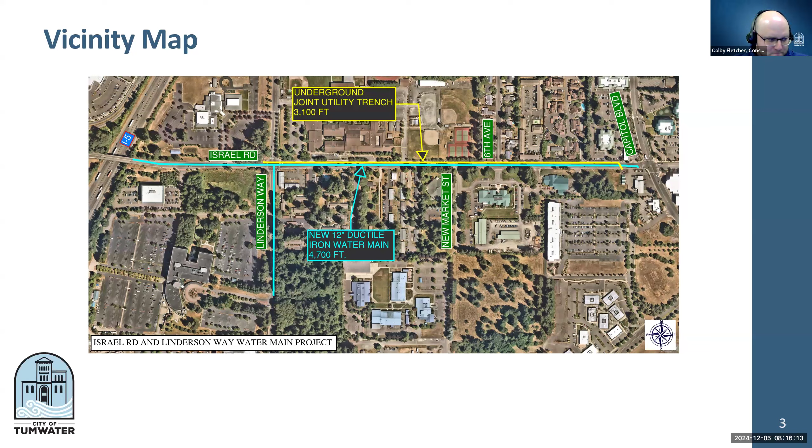For this project, overall there was almost 5,100 feet of brand new ductile iron water main for water transmission, including 22 connections to existing water lines and services, laterals for private services. There were also 57 new gate valves, 6 new hydrant assemblies, and 14 water service connections. The joint utility trenching also occurred, totaling about 3,150 feet, including PSE Electric, Lumen, Comcast, and Astound. So all those utilities are now underground.

And it also included 330 square yards of new sidewalk, driveway, and curb ramps that we had to demo out in order to get some of these new water services and stuff in.

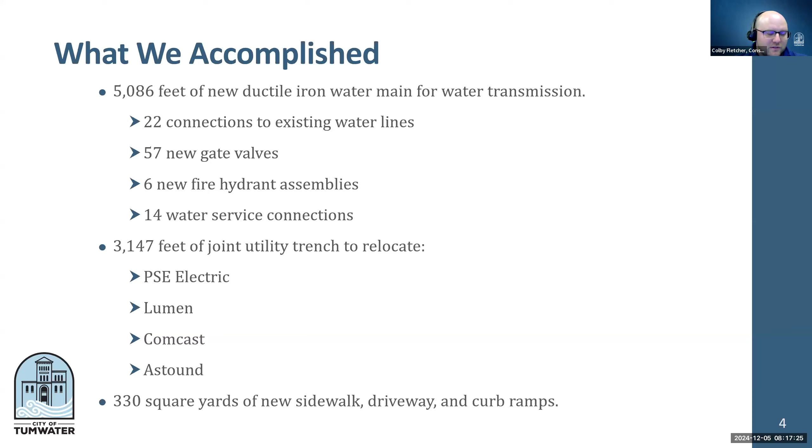As far as the joint utility trenching is concerned, it's been a lengthy process trying to get PSE and all the private utilities undergrounded. They are all complete now, and we're just waiting for PSE to come out and remove the poles.

I'd like to showcase a couple photos highlighting some of the challenges we had. This is the trench excavation and water main installation, here's the brand new water main. As you can see in the photo on the left, we often had to navigate existing utilities, including some that were never located or that we didn't have records of, so there were a lot of challenges navigating that. The photo on the right is a typical valve assembly.

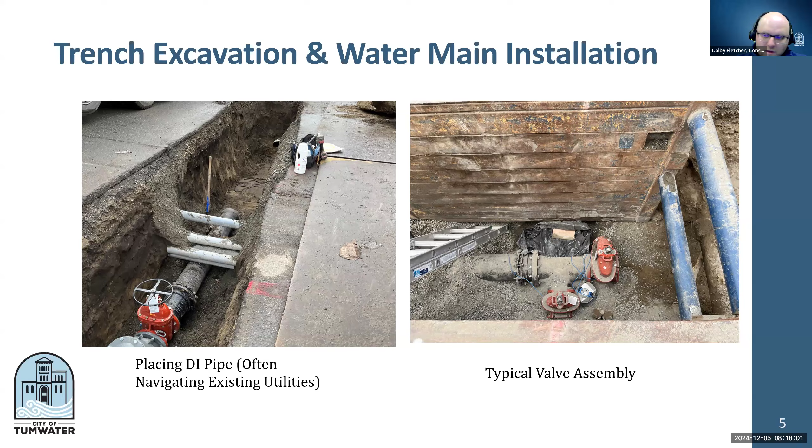Here's some trench restoration photos. You've got the shoring in there for the workers to install the ductile main in the trench, backfilling it on the left, and then going through with the HOPAC and using density testing from MTC, one of our on-call consultants, to confirm that our trench was compacted correctly and accurately.

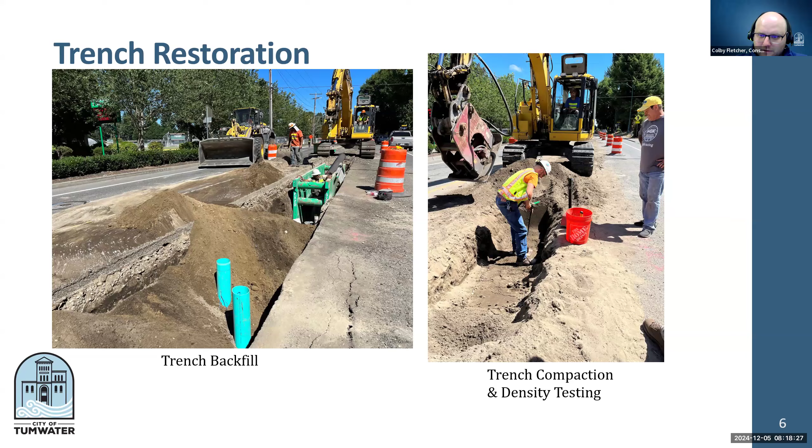This is the last slide showcasing the joint utility trenching that occurred. On the left you can see the larger conduits and the separation between them - that's all the PSE transmission conduit, with some pretty large ones for their electrical mains. On the right side is all the private utility conduit, which included a spare for the city in case we ever wanted to do something in the future. In the right photo, we have our PSE pull vaults and a transformer vault installed right in front of the high school.

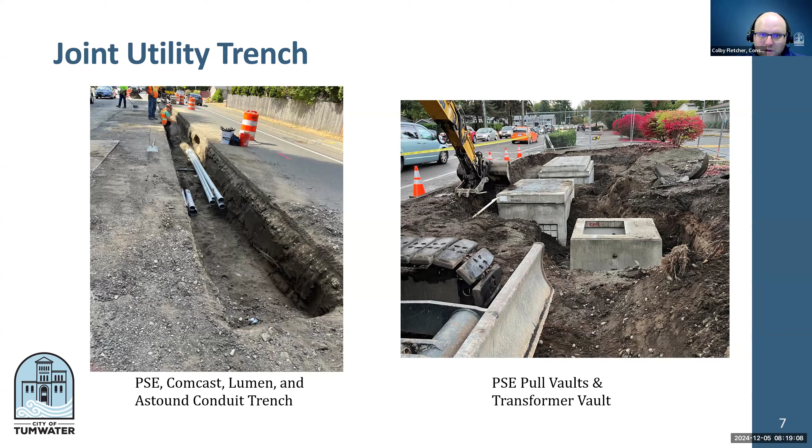So the financial summary and project timeline: we broke ground on this project on July 31st of 2023. Substantial completion occurred on April 12th, 2024, and physical completion occurred May 9th, 2024. Overall funding was the Water Fund CFP, and the lowest bid was Reed Trucking and Excavating at $3,365,536.16, with a final contract amount of $3,866,098.95. We do realize this was over the original bid amount by approximately 15%.

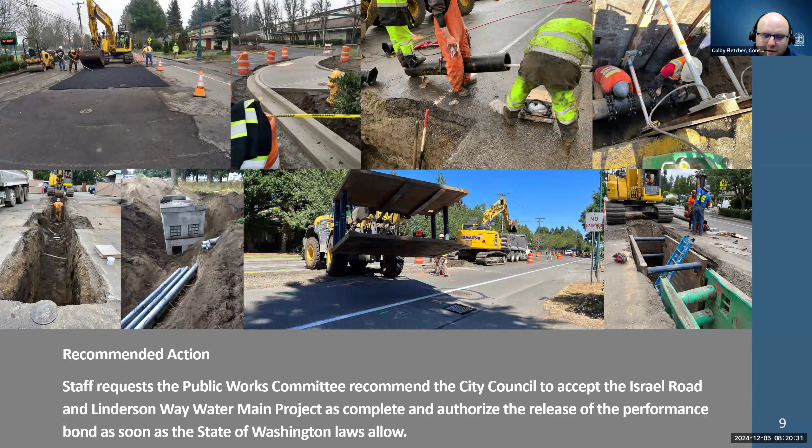So that concludes the presentation I have. The recommended action is there, and I'll be available to answer any questions.

All right, okay, Councilmember Jefferson, do you have any questions?

Colby, I appreciate the photos and I love the photos because it shows our humble - and I call you humble - employees hard at work, just the quiet professionals behind the scenes, working hard. So thank you, keep those photos coming. Will do.

Yeah, echo that. People just take it for granted when you turn your water on, so I appreciate your work making sure we have access to safe water.

All right, with that, if you don't have any other questions, I'll go ahead and read the recommended action. Staff requests the Public Works Committee recommend the City Council accept the Israel Road and Linderson Way water main project as complete and authorize the release of the performance bond as soon as the laws of the state of Washington allow. So moved.

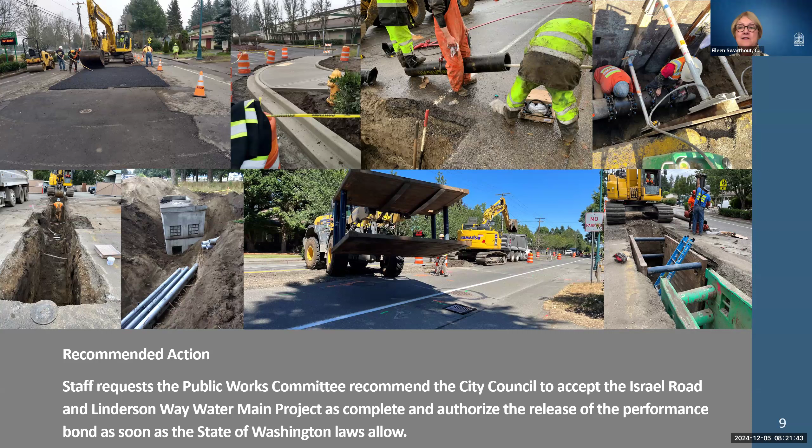All right, all those in favor say aye. Aye. All right, another one down.

Thank you, Colby. I keep waiting - we're gonna have a grand opening someday. I keep thinking it's probably gonna be in the rain though, to celebrate the opening of that road officially.

All right, so it looks like we're moving on to the next item, the acceptance of work with Specialized Pavement Marking LLC for the 2024 citywide striping project. Colby, you're back up again.

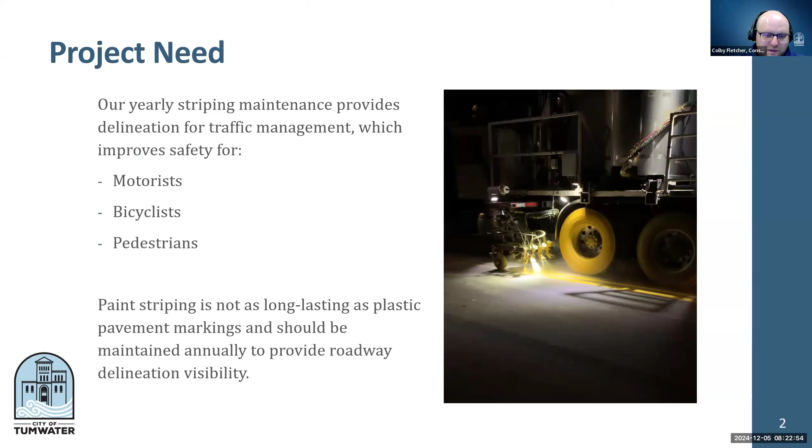2024 citywide striping acceptance of work presentation. This project is our yearly striping maintenance project, providing delineation for traffic management and improved safety for motorists, bicyclists, and pedestrians. We typically use paint to update our longitudinal lines. It's cheaper and more cost effective. It doesn't last as long as plastic pavement markings, but that's why we do this annually, just to increase visibility of our roadways.

Project overview, with a vicinity map showing the magnitude and scope of this project. The scope was to repaint existing pavement markings, restripe Deschutes Parkway's parking stalls, and change the center skip stripe to a solid double center stripe.

The operations of this work were primarily done on weekends, coordinated outside the busier traffic hours. This was a mobile operation with signs and chaser vehicles following behind the striping company, ensuring drivers didn't change lanes onto the wet paint.

You can definitely see the extent of that over there, as far as all the roadway networks that got restriped.

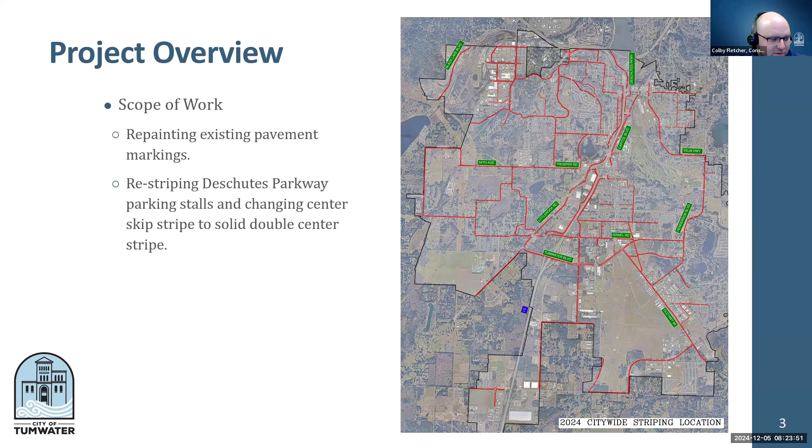What we accomplished: we restriped all the longitudinal pavement markings, with just one application over existing markings. We touched up the centerline stripes, fog line stripes, bicycle lane stripes, and the parking stalls at Deschutes Parkway. Overall, we had 515,000 linear feet of 4-inch paint line, just over 97.5 miles, and 169,000 linear feet of 8-inch paint line, just over 32 miles.

Since this project was just painting, plastic pavement markings and raised pavement markers are planned to be tackled in the 2025 pavement maintenance project. We're actively designing that project in-house currently and will get it going next year.

Financial summary: the estimated construction cost range was approximately $130,000 to $150,000. Our low bid with SPM, Specialized Pavement Markings, was $136,933.50, and our final project cost was $129,436.76, a little under budget. That was due to a couple of roads originally scheduled that didn't end up getting done.

This project was funded by the City of Tumwater Streets operating budget. With that, the recommended action is similar to the last one. I'm able to field any questions if there are any.

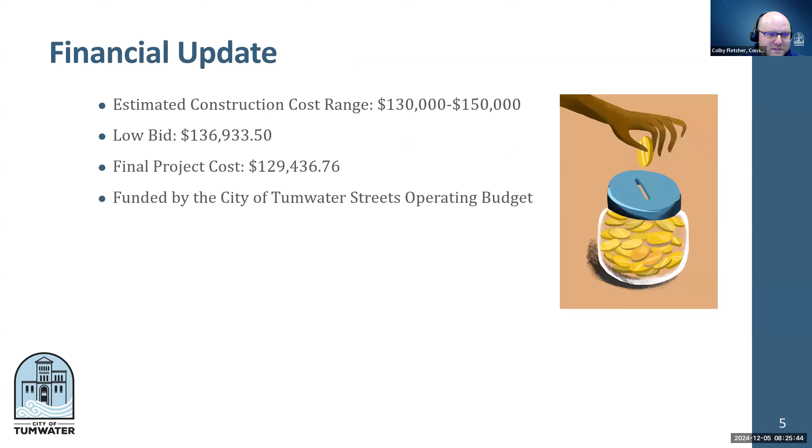That'll be coming up next. Appreciate that. I live on R.W. Johnson, and we were striping that one. I didn't realize we were striping, and I hear this weird noise, and it's like, oh, we got stripes. Thank you, you're very stealth-like out there.

So the recommended action before us: staff requests that the Public Works Committee recommend the City Council accept the 2024 citywide striping project as complete and authorize the release of the performance bond as soon as the laws of the state of Washington allow.

I second that motion. All those in favor say aye. Aye. Aye. All right, thank you, Colby, for another year of great work. Thank you, enjoy the rest of your day.

All right, so now we're going to move on to our last topic, and it has to do with the Transportation Benefit District. We'll be hearing from Brandon.

Actually, I'm going to jump in front of Clint real quick. Clint Ritter is going to be doing the presentation today, and I just wanted to introduce him. He's our new Assistant Director for the Transportation and Engineering Department, since Mary Heather moved on to the city of Pasco. Welcome. He's got a boatload of experience working for Pierce County, WSDOT, and the Transportation Improvement Board.

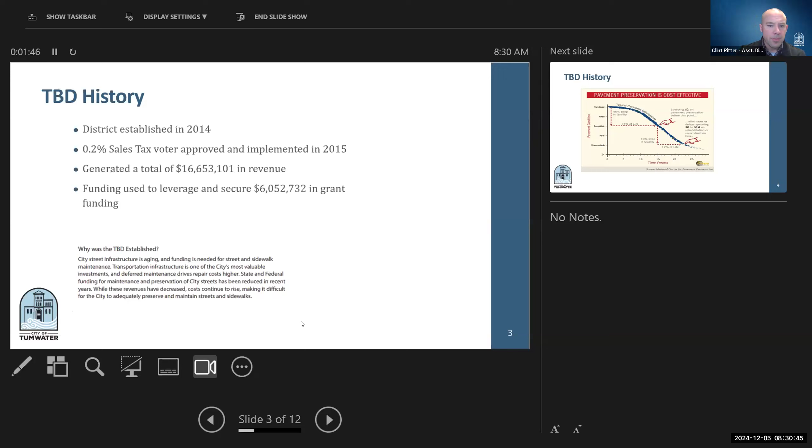This graph here may look familiar to some of you. There's a lot of variations of it, but it does a good job conveying the importance of pavement preservation and ensuring we take care of the condition of our streets. Pavement maintenance and preservation is cost effective in the long term. If we can keep our streets in an acceptable condition or above using pavement preservation, such as overlays, chip seals, crack sealing, that reduces our cost in the long term and prevents our streets from getting into that poor, unacceptable condition where more extensive treatment, such as reconstruction, would be required. It's a lot more costly to do that.

The focus of this funding really has been on pavement preservation, and we've seen some really good outcomes because of that.

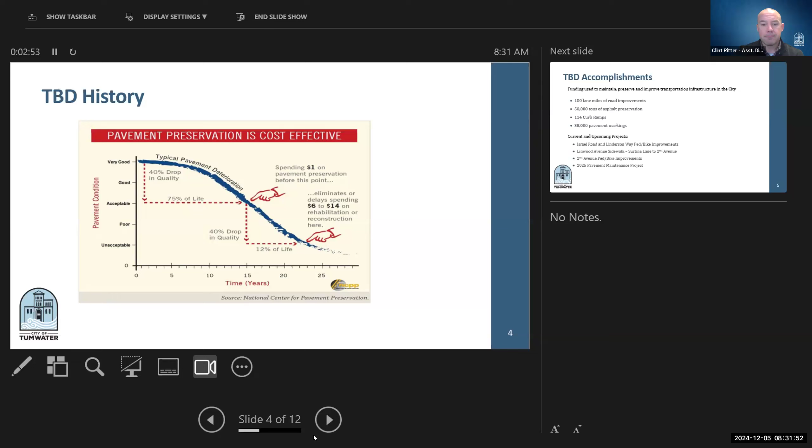Just to highlight a few accomplishments over the last 10 years: we've improved 100 lane miles of streets by putting down approximately 50,000 tons of asphalt, reconstructed or installed 114 curb ramps, and over 38,000 pavement markings. That's past projects. Current and upcoming projects next year using TBD funding include the Israel Road, Linderson Way bike-ped improvements, currently close to being done; the Linwood Avenue sidewalk project; 2nd Avenue ped-bike improvements; as well as our pavement maintenance project for next year.

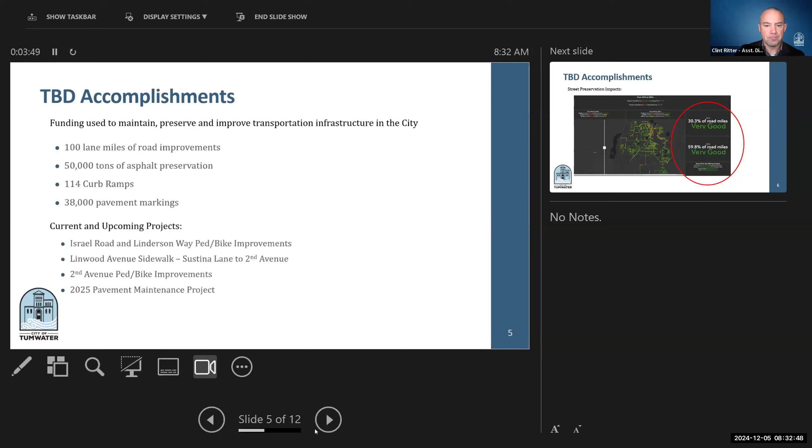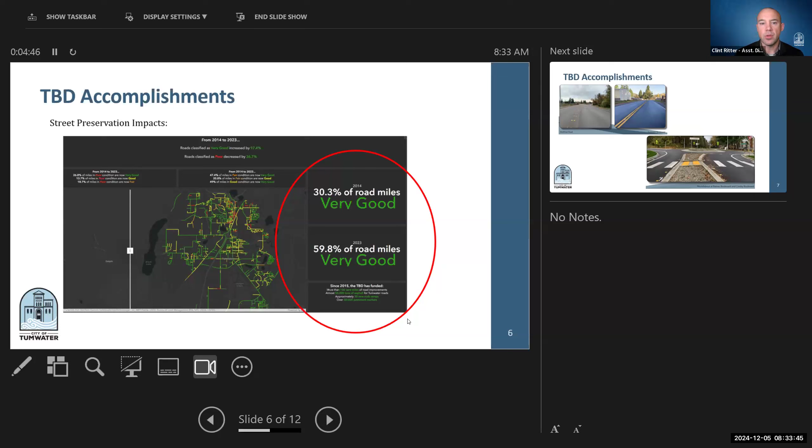We have a very useful GIS database of our pavement preservation efforts that tracks the pavement condition index of all streets in the city of Tumwater. This gives a comparison from the overall rating of streets in 2014 versus 2023, the latest data we currently have. In 2014, 30.3% of road miles were in very good condition, which is where we like to see streets at or above. In 2023, that improved to almost 60% of road miles. Much of that was due to the TBD funding we were able to utilize for many of these projects.

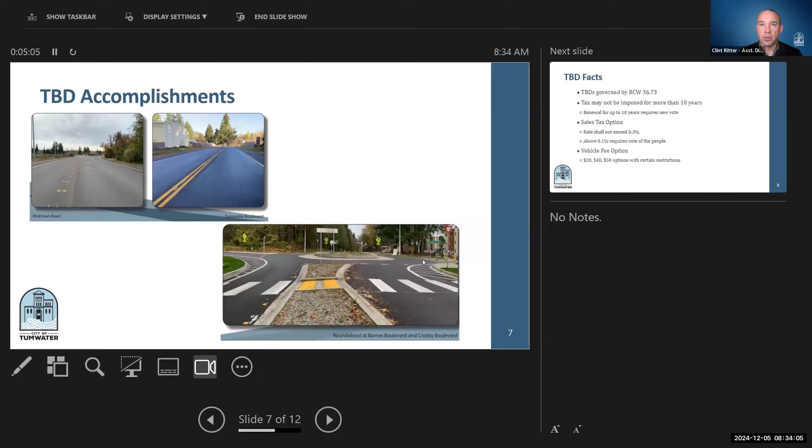Just a couple pictures to show some of the projects that were done. You can see the improvements to Mottman Road, Tumwater Boulevard, and the roundabout at the intersection of Barnes Boulevard and Crosby Boulevard, all funded by TBD funds.

Now moving on to a few facts about TBDs. They're governed in state law, RCW 36.73.

There's obviously a lot to that RCW, but I wanted to point out a couple highlights. The tax may not be imposed for more than 10 years, and any renewal of that tax for up to 10 years requires a new vote. That's essentially why we're here talking about this now, given that the tax was first implemented in 2015. It's set to expire in 2025, so we would need to renew it with a vote.

There are two primary funding mechanisms of a TBD allowed by state law. The first is the sales tax option. The rate cannot exceed 0.3%, and anything above 0.1% requires a vote of the people. Currently, as mentioned before, the sales tax for the TBD in the city is 0.2%.

The other option is the vehicle fee option. There are a lot of nuances and restrictions, but it can basically start with a $20 car tab, and that can be increased over time with further legislative action to $40 and $50. One key difference I wanted to point out, and the reason Tumwater went with the sales tax option originally, is that it spreads the burden not only to residents of the city, but to everyone who shops and does business within the city.

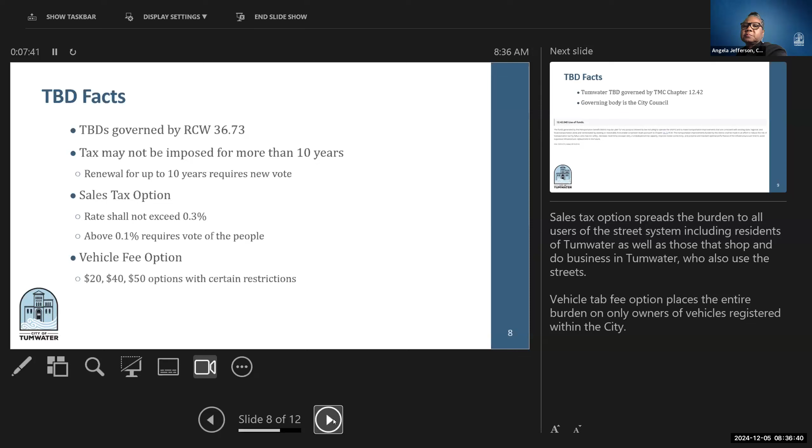So when does this expire, or when are we asking the public to renew it? Is it this year? No, it will be 2025. Okay. Yep, and I think on a couple slides I have the actual election date that we'll need to be tracking. All right, thank you. So those are the primary two options.

As a result of establishing the TBD and the sales tax in the city, it is also further governed by Tumwater Municipal Code Chapter 12.42. The governing body is the city council, and 12.42.040 describes the use of funds, which is pretty flexible in terms of infrastructure related to streets.

A few other facts, looking at a more regional or statewide perspective. This is a commonly used funding mechanism. There are 116 cities in Washington currently that have formed a TBD. The majority of those have been funded, utilizing the sales tax option. There are 5 counties in Washington that have formed TBDs, but only one of those has actually been funded. The remaining 4 just have a district established and for whatever reason have not been funded.

Since 2011, there have been 33 ballot measures for cities specifically using the sales tax option. 30 of those have passed, and the 3 that did not pass failed by a very slim margin. So overall, statewide, it's been a very successful revenue option for local agencies.